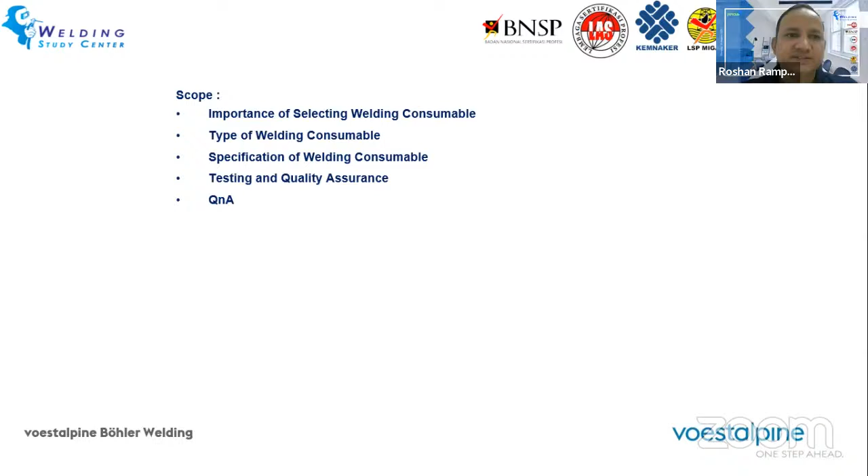The topic of today's webinar is selection of welding consumables. As already introduced, the basic points covered in this presentation include the importance of selecting a welding consumable, the different types of welding consumables, specifications for welding consumables, and testing and quality assurance requirements for welding consumables. These are the main topics for discussion today, and to support them I have included a few necessary subtopics. So let's start with the basics.

Let's briefly introduce different basic concepts in metallurgy and welding, starting with classifications of base material. What are the different types of materials? Here we are talking about metallic material, not non-metallic material. In metallic materials, there are basically two categories: ferrous alloys and non-ferrous alloys.

Ferrous alloys, as the name suggests, are basically iron alloys, meaning the majority of the elements present is iron. Non-ferrous means other elements are present as the main element.

What are the different types of non-ferrous alloys? One is nickel-based, another has aluminium as the main element, then copper, titanium, and other grades like cobalt alloys. These are a few categories or types of non-ferrous alloys.

Now coming to ferrous alloys, the main subcategories are unalloyed ferrous alloy, or unalloyed steel, and alloyed steel. Unalloyed, as the name suggests, has no alloying addition done to the iron or steel. Whereas in the alloyed category, there are low alloyed and high alloyed types.

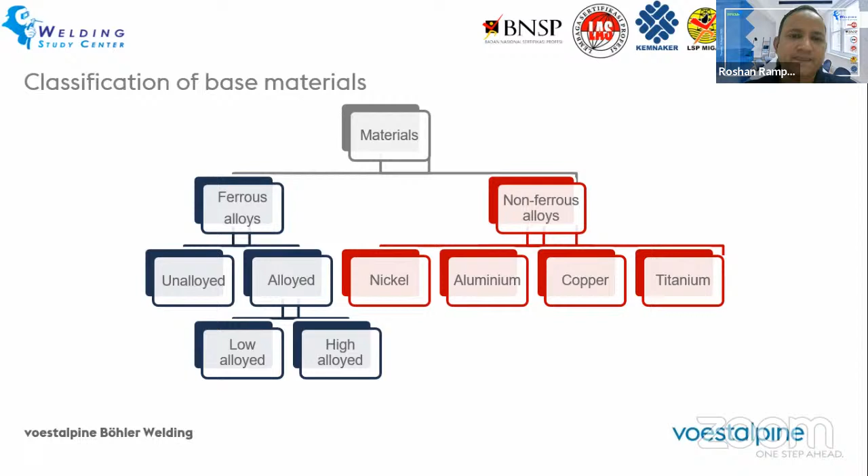Now let's talk about steel material. What is steel? Steel is a material which is an alloy of iron and carbon. It's majority iron, and when we add some percentage of carbon to it, it becomes steel. The maximum percentage of carbon allowed in steel is 2.06%, and beyond that it becomes cast iron. If you are aware of the iron carbide diagram, you are well aware about the categorization of steel and cast iron.

So why do we add carbon to iron? Because carbon increases strength and hardness, and the practical applications of steel are much more compared to pure iron, since pure iron as such has not much practical application. So carbon is added to different extents to get different properties.

Basically steel is an unalloyed material, but in practical application, there is no steel without any alloying addition. There may not be any material grades which just have iron and carbon in them without any other elements. So what are the other elements present? One is contaminants.

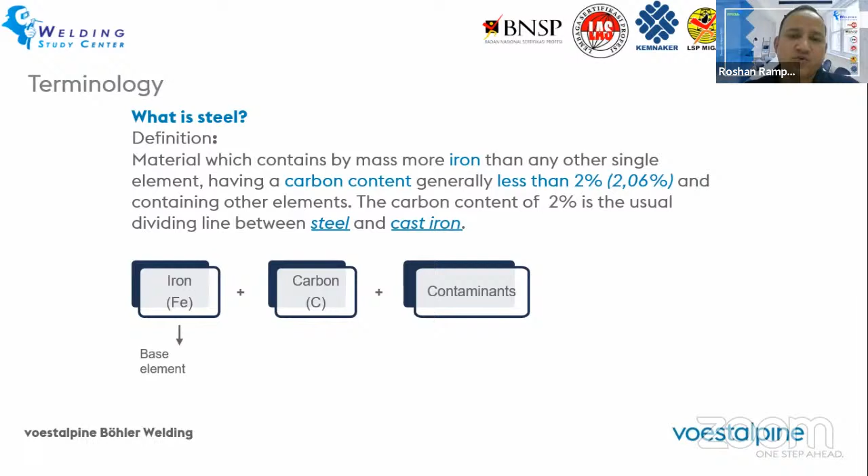Steel is produced by a steel making process from iron ore, then by refining process it is converted into the usable form of steel. During refining, there is still some level of contamination depending upon the acceptance criteria. Some are permitted contaminants, which are necessary up to a certain extent for certain properties, like manganese, silicon, and aluminum. These are generally deoxidizer elements added during the steel making process, and they are also present in the final steel up to a certain extent depending upon the type of steel being used.

Then there are non-permitted contaminants - we shouldn't really say non-permitted, but they are present up to a certain extent. We can't remove them 100%, but removing them to lower and lower percentages needs multiple refining processes or longer refining time, which increases the cost of the material. So depending upon the application and requirements, phosphorus, sulfur, oxygen, nitrogen, and hydrogen are left as is up to certain percentage levels, or certain ppm levels for nitrogen, hydrogen, and oxygen. Phosphorus and sulfur are also limited to a certain extent. These are the non-permitted contaminants.

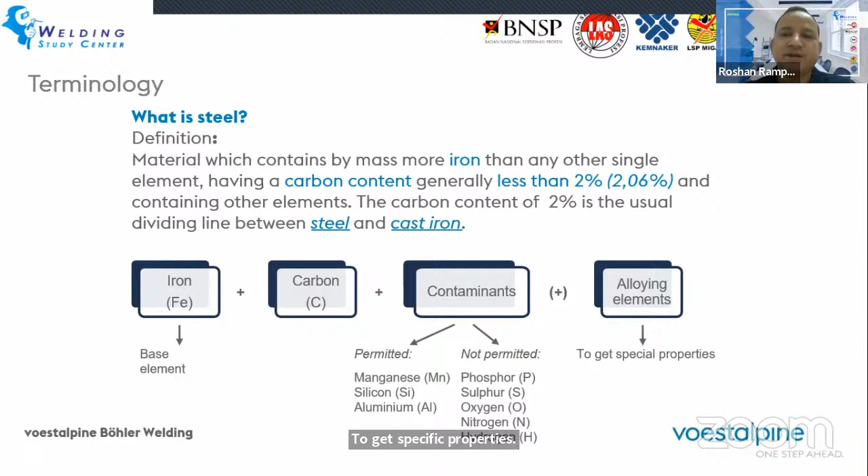So why do we do alloying? When we say manganese and silicon, we don't call these alloying elements - they are basically a part of steel itself, inherently present in it. But alloying elements are those elements which are deliberately added to steel to get specific properties. For example, chromium is added to get higher strength as well as corrosion resistance.

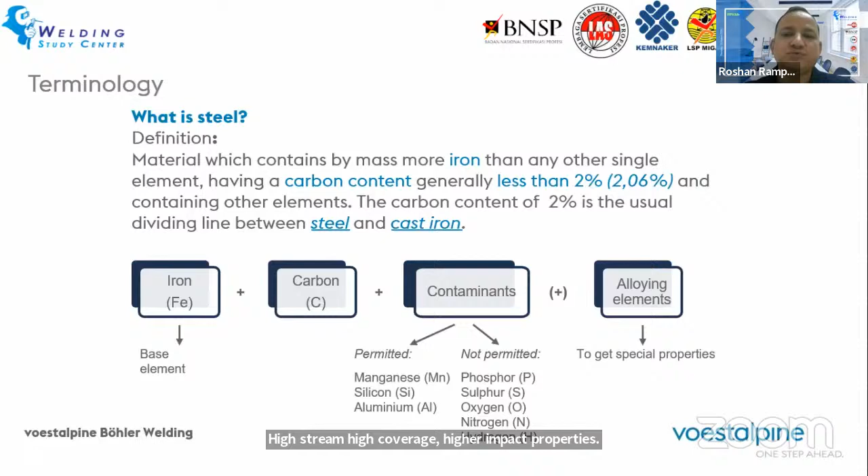Moly is added to get oxidation resistance at higher temperature. Likewise, different elements are added in different combinations to get special properties. What are these special properties? Because for practical application, we need high strength, high corrosion resistance, and higher impact properties. So for a particular use, we add a combination of alloying elements into the steel, and based on that, different types and categories of steel grades are available.

Now, when we talk about ferrous material, or steel, the majority of joining is done by welding. Most steel materials nowadays are majorly joined together by the process of welding. So what is welding? Most of you may be aware of what welding is - you might have been doing it on your regular day-to-day job.

But the book definition of welding is this: it's a joining process in which two or more parts are united or joined, producing continuity in the nature of the workpiece material by means of heat or pressure or both, and with or without the use of filler metal.

There are different numbers of different types of welding processes depending upon the source of energy, like whether it is heat, or whether it is pressure, or a combination of heat as well as pressure. So the most common is the arc welding process. Then there are resistance welding processes, solid state welding, brazing, oxy-fuel, and soldering. All these are joining processes, or welding processes, as a broad category.

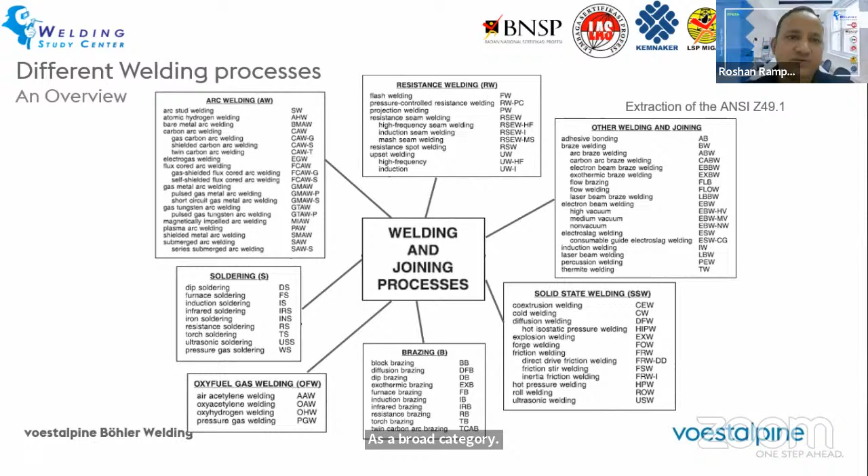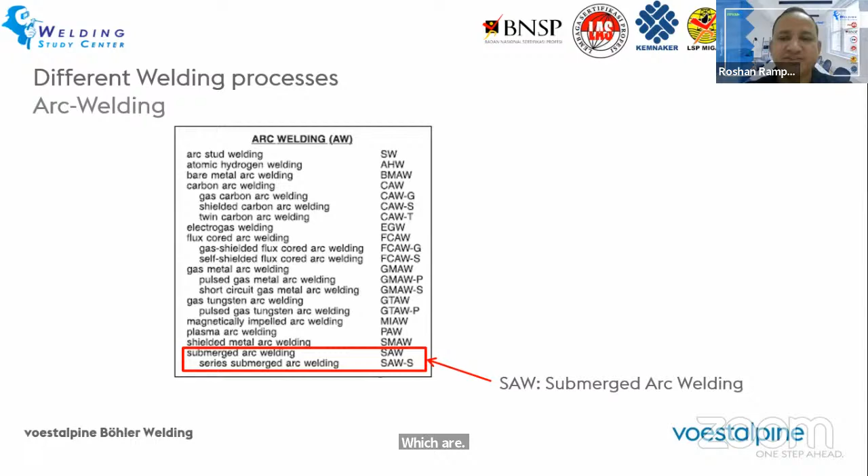The most practical applications for welding are in the arc welding process, and there are a few welding processes which are very commonly used in the welding industry. These are SMAW, shielded metal arc welding, GTAW, GMAW, FCAW, and submerged arc welding, SAW. In this topic, we will be covering these five processes in a little bit of detail.

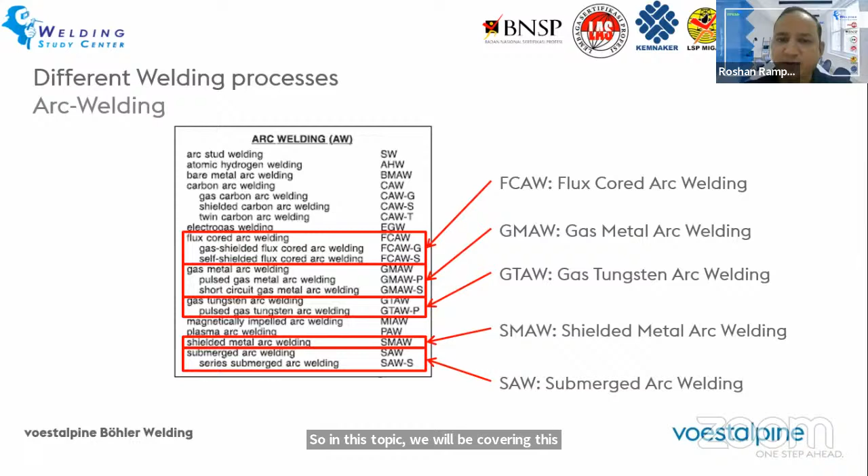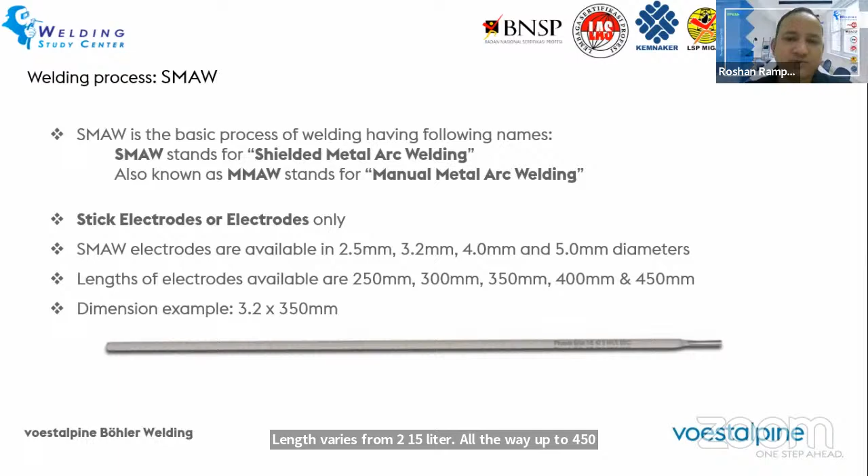So coming over to the SMAW process. SMAW stands for shielded metal arc welding, also known as manual metal arc welding. The main consumable part is a stick electrode, or electrodes. These are normally available in 2.5, 3.2, 4 millimeter and 5 millimeter diameter, with length varying from 250 millimeter all the way up to 450 millimeter. This is a photo where you can see a typical welding electrode.

Similarly, GMAW is gas metal arc welding. This is a gas shielded welding process, also called MIG or MAG. Whenever an inert gas is used as the shielding medium, it is the MIG process, or metal inert gas arc welding, and if an active gas is used, it is metal active gas welding. Different types of spools are used, with wire diameters ranging from 0.8 all the way up to 1.6 and 2 millimeters. The most common form is the plastic spool or basket spool, also available in drum packing.

The next process is flux core arc welding. This is a variant of the GMAW process itself, and the main difference is that in GMAW the spool or wire is a solid wire, whereas in flux core arc welding the wire is a tubular wire, meaning flux powder is present inside the wire tube. The variant of this process is MCAW, in which the wire, instead of having flux powder, has metal powder inside, which is called metal cored wire.

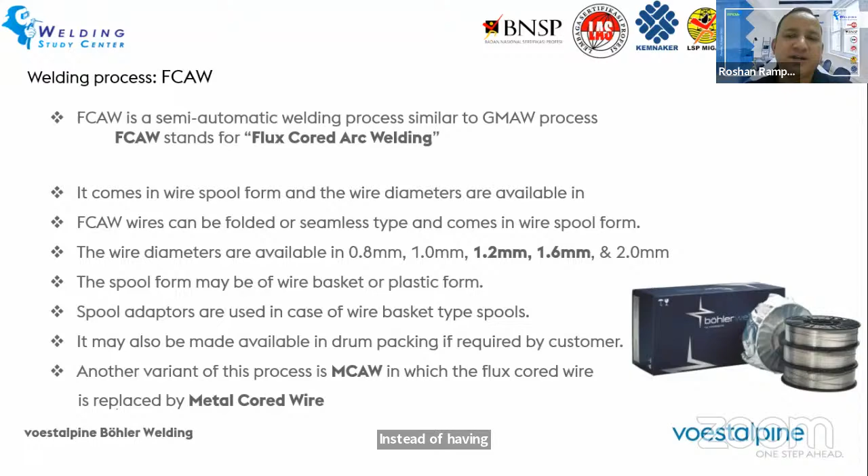The next process is GTAW, gas tungsten arc welding, in which the filler rod acts as filler wire. It is not an electrode, because unlike SMAW, GMAW and FCAW, where the wire or electrode itself acts as an electrode with current flowing through it, in GTAW the tungsten electrode is the non-consumable electrode through which current flows, whereas the filler metal, or TIG rod, is added as filler. So the current does not flow through the consumable part. That is the difference between a consumable electrode and a non-consumable electrode.

The dimensions generally used are 1000 mm length, and the diameter of the TIG rod is generally 1.6, 2.0, or 2.4, though bigger and smaller diameters are also available. For automatic TIG welding, it can also be supplied in spool form.

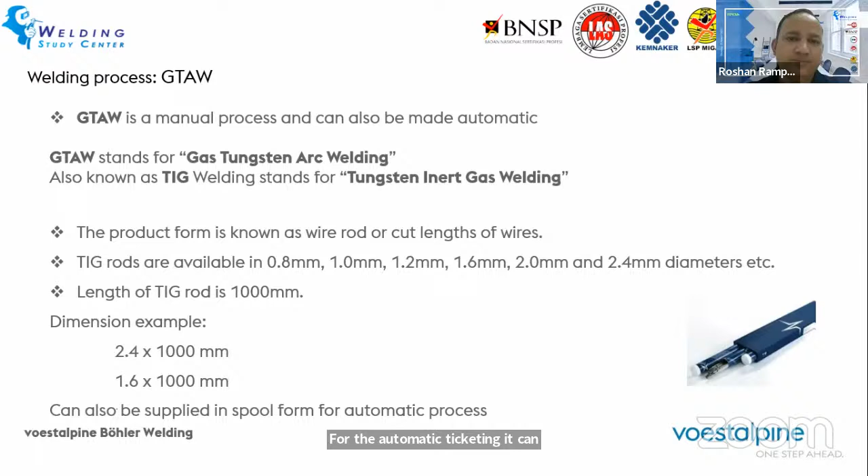Now the next process is submerged arc welding. This is an arc welding process most commonly used in fully automatic form, meaning the travel speed as well as the feeding of the wire is automatically controlled. As the name suggests, the arc is submerged under a burden of flux. There are two consumable parts supplied separately: the SAW wire and the SAW flux. Flux is an important part in this process, and the most common welding position in which SAW is used is flat, and in certain applications, horizontal position.

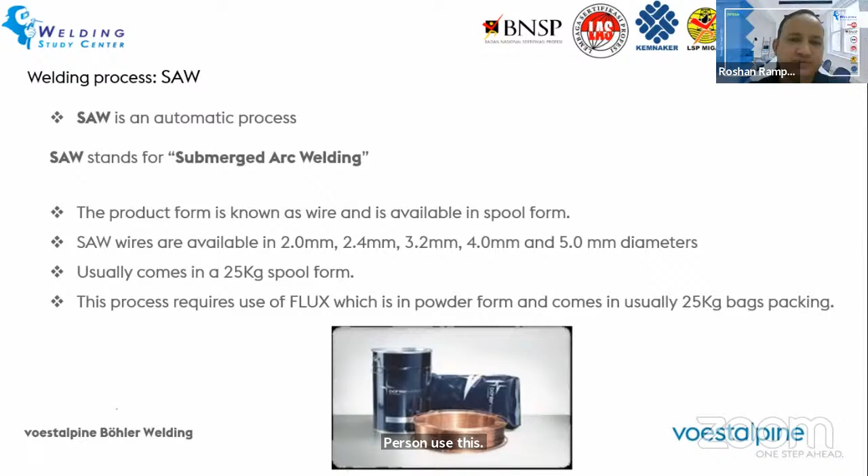Now, when we talk about welding positions, there are different welding positions classified as per EN/ISO as well as ASME code. So when we talk about ASME code and EN/ISO, there are different types of positions, or different nomenclature, for different positions in which welding can be carried out.

The first photo here is mentioned as PA position, which is a 1G position. That means the electrode is held vertically and the plane of the base material is horizontal to the ground, with welding carried out from the top. So this is a flat position, or 1G, or PA position. Similarly, 2G is a position in which the plane, or axis, of the plate is vertical to the ground, perpendicular to the ground, and the welding is carried out from side to side.

In the similar way, 3G position or PG position is the vertical down position, and another variant is vertical up position, as you can see in the photo.

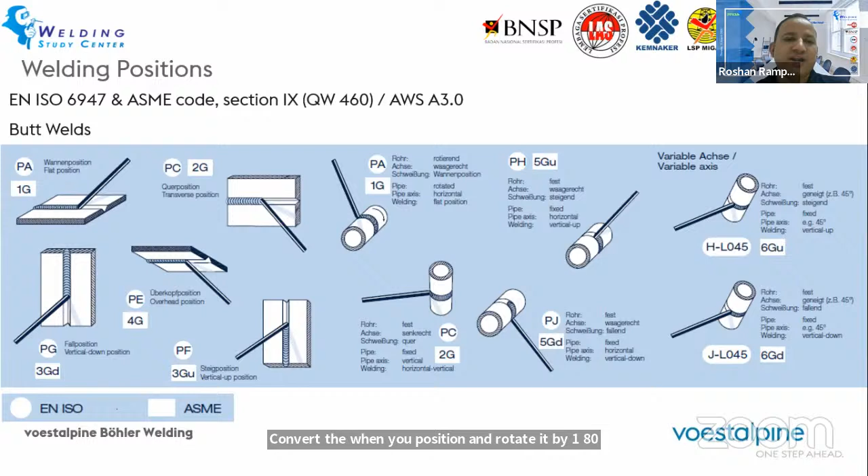Then there is the overhead position, in which if you convert the 1G position plate and rotate it by 180 degrees, the plate will become overhead, and the position will be carried out from below.

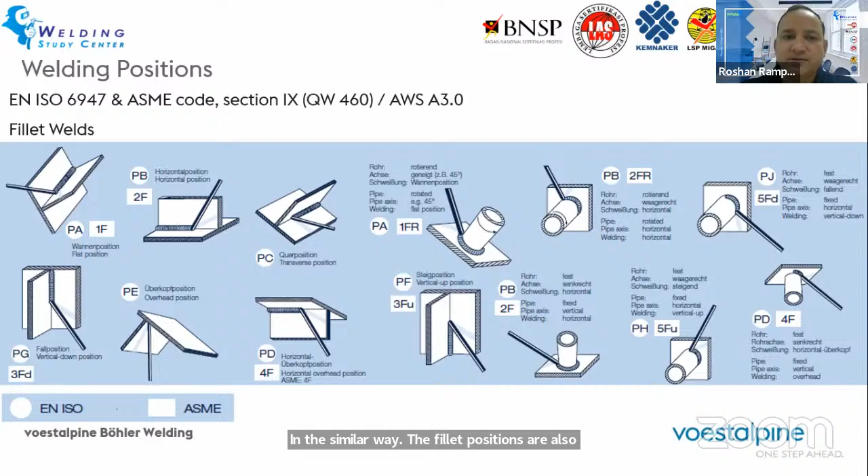In the similar way, there are welding positions for pipe: 1G, 2G, 3G, 5G, and 6G positions. Similarly, the fillet positions are also classified as 1F, 2F, 3F for the pipe. This is just for your reference to know about the welding positions.

Now coming to our topic of why we need a guideline to understand the selection of welding consumable. In most applications we do qualify our procedure, but what is the basis of choosing the right welding consumable?

The first and foremost important criteria is the application's requirement. This depends upon what component we are going to fabricate and what material is selected for that particular application and component.

There are different welding consumables, different grades and types, designed for joining matching or compatible base materials. Selection of the right welding consumable for the right base material ensures correct joint integrity as well as fusion with the base material, which is very important for the integrity of the whole structure. So first and foremost is material compatibility.

Next we talk about the mechanical properties of the base material and its matching welding consumable. Whenever we select a welding consumable, depending on the base material's mechanical properties, it should have matching mechanical properties. In most cases, slightly overmatching welding consumables are used for a particular grade of base material.

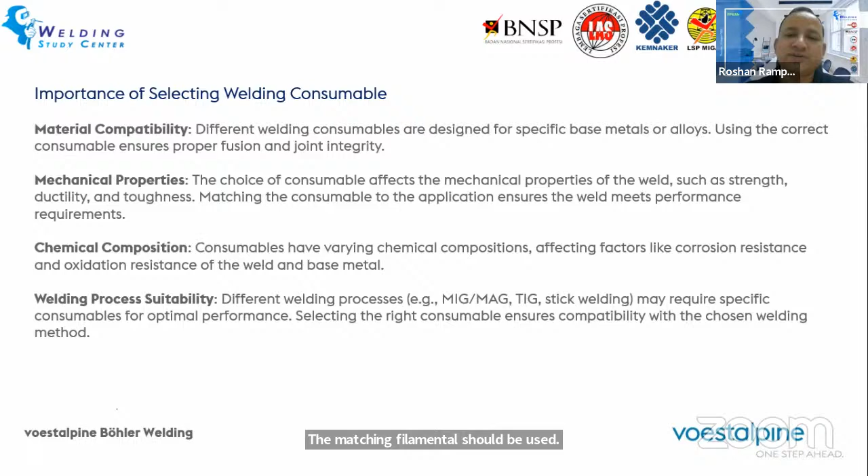Next is welding position. For example, when we use one particular type of electrode, some types are used for a particular welding position but not suitable for any other welding positions. For instance, some electrodes are designed for vertical down position, but not all types of welding electrodes can weld in vertical down position.

It should be an all-position electrode, not only for flat and horizontal position. So depending upon the welding position you are going to use, the welding consumable has to be selected.

Then the next point is ease of use, because the welding consumable should also be selected based on its weldability and suitability for that particular application, depending on how easy it is to use. So if all other properties are matching but ease of use differs, for example, rutile type electrode is better as compared to basic type electrode.

Then that particular rutile type electrode should be selected because it is easier to use, has better stability of the arc, and very less spatter level. All these criteria are also used because they improve the efficiency of the welder as well as reduce the downtime.

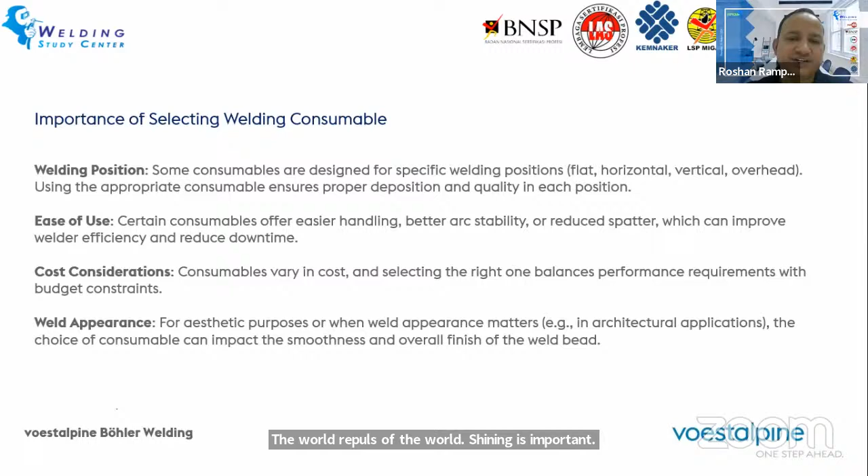Now coming over to what are the different specifications of welding consumables.

Welding consumables are classified as per different national and international classification specifications like AWS, ENISO, DIN or JIS specification. Different societies have their own specifications for classification of welding consumables, but the most common in our day-to-day job work is AWS classification and sometimes ENISO classification.

AWS is nothing but American Welding Society, which assigns a specific code to welding consumable that indicates their type, their material compatibility, then its intended use. For example, AWS A5.1 covers the SMAW electrode for unalloyed steel. Then material grade.

The classification also includes the type of material for which the welding consumable is designed for. For example, when we say ER316L, that means this particular filler rod or wire is designed for joining of stainless steel 316L type of base material. It is also classified based on the chemical composition. Even for the nickel alloyed steel, the nickel alloys also have classification based on their composition, like

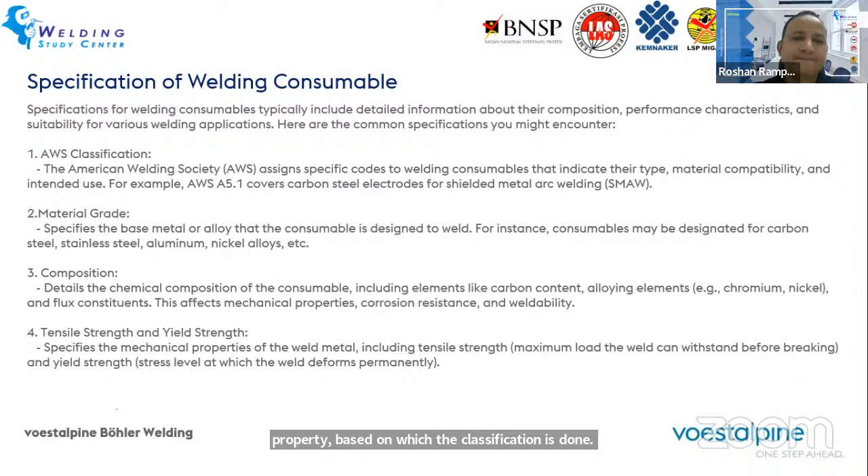NiCrMo3 - this indicates the main alloying elements. Then the tensile strength and yield strength are also important properties based on which the classification is done. It also includes the elongation criteria. Then impact toughness is also considered for classification purpose in some of the specifications.

Then welding position is important. When we talk about welding position for classification, specifically for SMAW as well as FCAW wire, 0 is generally indicated for flat and horizontal classified consumables, whereas 1 in the classification indicates it's an all position wire or all position electrode.

Some products like FCAW wire are also classified based on the shielding gas for which it has been designed, like general designation for FCW is mixed gas M21 or 100% CO2. So the classification will also have this indication of the shielding gas. Then welding parameters like voltage, current, wire feed, travel speed are also to be specified because they will decide the deposition rate as well as the weld quality.

Then certifications and approvals - different organizations, international bodies, regulatory bodies have their own specification for classification of welding consumables. So why do we need these different specifications? To have a uniformity across the regions or across the nations. It helps welders, welding engineers and fabricators to select the right consumable type for their base material or for their welding application.

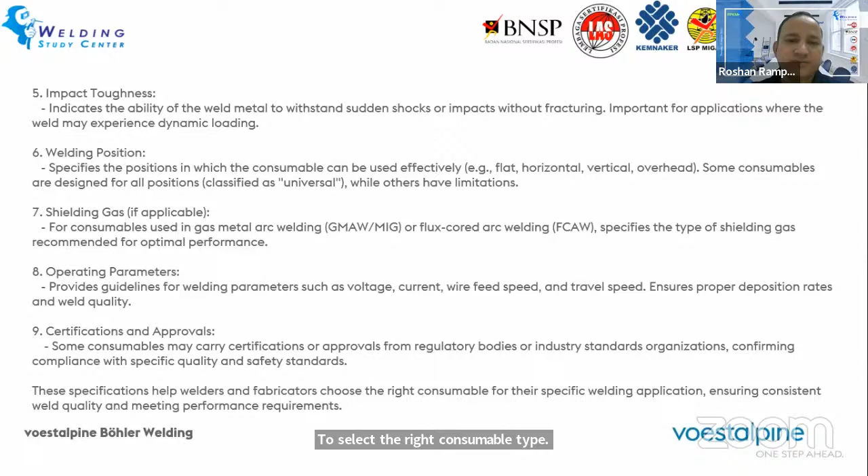So what are the different testing requirements for classification or to maintain the quality of welding consumables? There are basically two different types of material testing. One is non-destructive NDT, which includes radiography, LPI, MPI, visual inspection and ultrasonic UT testing, where the material is not destructed but the material integrity remains as it is. Then there is destructive testing, in which the material is broken down to check a particular property, like tensile test.

The tensile specimen is prepared, put into the universal tensile testing machine, and tested to determine the tensile properties including UTS, YS, and percentage elongation. Similarly, impact specimens are prepared and impact testing is done at different temperatures. Bend test, creep rupture test, hardness test, and metallography are some examples of destructive testing. Also, corrosion testing, which is not mentioned here, also comes under destructive testing, but it is not a mechanical test, it's a corrosion testing.

The testing and quality assurance process for welding consumables are very important to make sure they meet the minimum requirement for the classification or for the application, so that the integrity of the weld joint is maintained. What are the different testing to be done or criteria considered when we say the quality of the welding consumable is met as per the requirement.

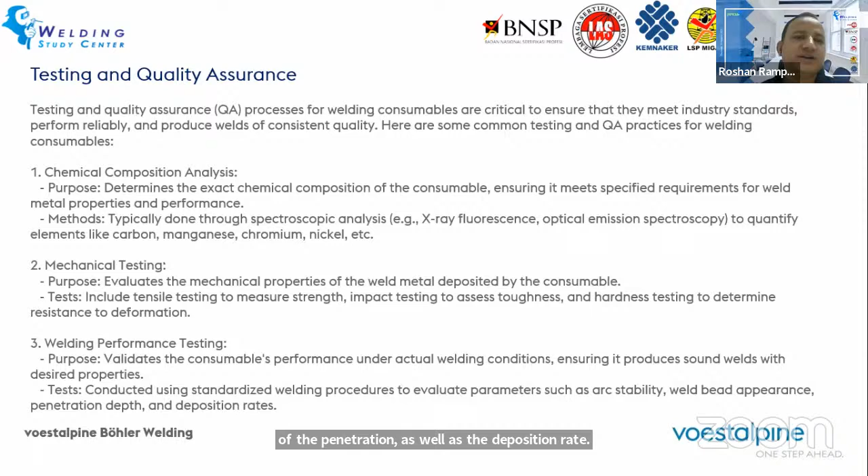Then measurement of the diffusible hydrogen content. Why is it important? Because for most steel materials, we do not need higher hydrogen content in the weld deposit, because if higher hydrogen is deposited through the welding consumable, there is a possibility of cold cracking or hydrogen induced cracking in the weld joint, HAZ, and also in the base material. So the diffusible hydrogen content is determined, and based on that, different classifications like H4, H8 are given to welding consumables.

There are different lab methods to determine the hydrogen content. Then microstructural analysis of the weld deposit is also done to check the phases which are present, like ferritic phase, bainite, martensite, or whatever secondary phases are present in the weld deposit, which can be determined by microstructural analysis. Then corrosion resistance tests, as per different international standards, are conducted to check the suitability for any particular corrosive media application.

There are also different tests involved for different types of corrosion, like pitting corrosion, intergranular corrosion, crevice corrosion, and others.

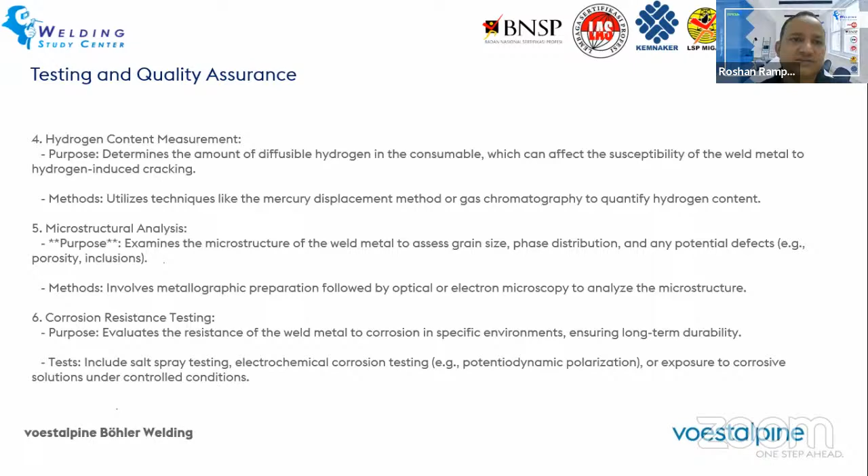Then another quality assurance criteria is the dimensional inspection of the welding consumable. So when a particular size is mentioned, like 3.2 into 350 mm for the welding electrode, there is a tolerance level given in the international standards which needs to be met for that particular size. It should not happen that 3.2 mm diameter is mentioned, but the actual dimension is 4 millimeters, because the selection of welding parameters will also change accordingly. So it should be within the tolerance level.

Then certification and compliance with relevant industry standards, international codes and regulations, and client specifications also has to be met. In many cases, the certificate of compliance is also issued along with the test report, the certificate, and traceability of the material can also be given.

Then process control and quality management system is also to be checked. The most common quality management system is ISO 9001:2015. So these are some of the criteria which are tested or done to make sure that the selection of welding consumable, or the welding consumable which is supplied, is meeting the application's requirement.

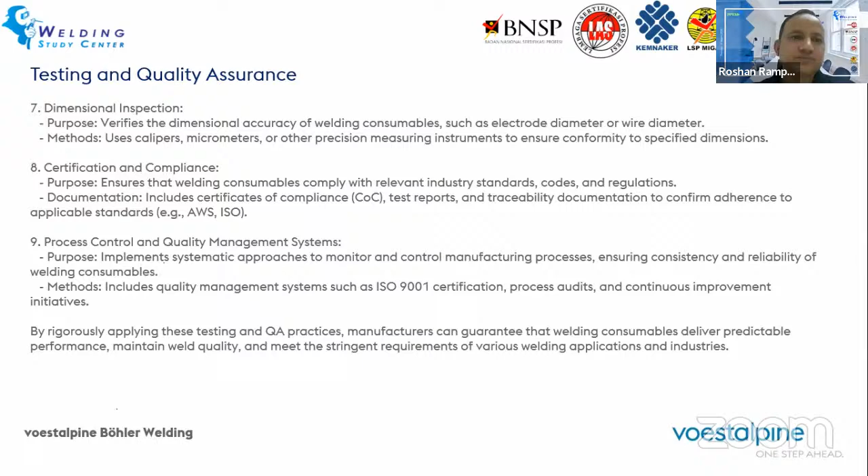Now, as we have seen in the previous slides, there are different types of welding processes. There are different types of welding consumables for different processes, and other accessory consumables are also there. So based on the welding process, different welding consumables are available.

For example, for the SMAW process, coated electrodes are used. The structure of the stick electrode has a steel core wire, and on top of it, the flux coating is covered. Depending upon the type of electrode, the composition of the core rod and the type of coating is different. So what is the main function of the coating? It contains a mixture of flux.

The basic function is it helps to shield the molten weld pool from atmospheric gases and to stabilize the arc. In some cases, it also acts as a medium to add additional alloying elements from the flux.

Then for GMAW or FCAW, the wire used is either solid wire or flux core wire. For GTAW, these are solid wires. For FCAW, it is a core wire or tubular wire. Then for submerged arc welding, there are two combinations: one is the wire, and the other is the flux. They are fed separately, but in combination, they determine the properties of the deposited weld metal. So these are the welding consumables for different processes.

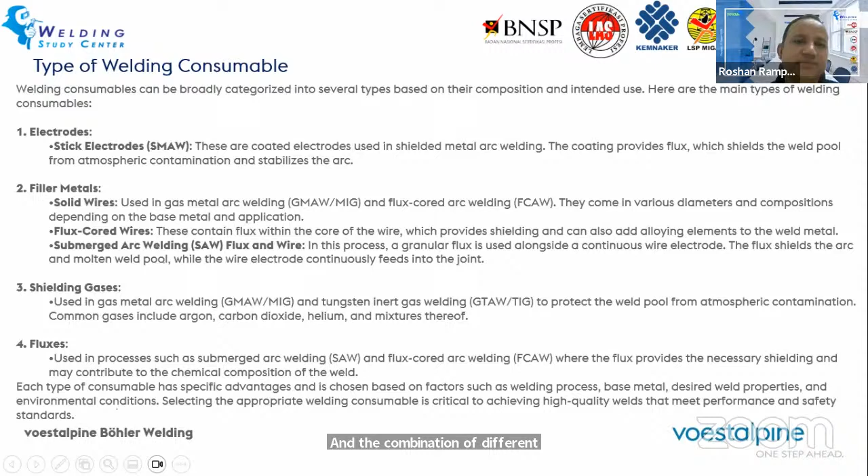So what are the main tasks of the flux in an SMAW electrode? This helps to have shielding against the atmospheric air so that there will not be any contamination and porosity. Then it improves the welding behavior like arc ignition, wetting properties, and viscosity of the molten metal pool. These are also determined by the composition of the flux. It also helps to get higher recovery.

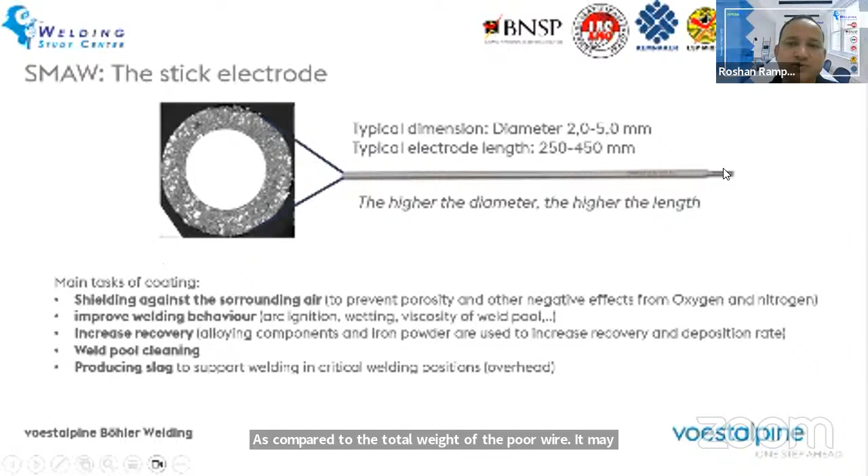For example, 70-18 - that 18 indicates that iron powder is added into the flux so that we get higher recovery. Recovery here means, when we talk about the total weight of the core wire, how much weld deposit we get in combination of the electrode as compared to the total weight of the core wire. It may be more than 100% also. So this also helps to determine the metal recovery.

Then the slag which is formed during welding also helps in cleaning the molten metal pool. It produces the slag, and in out-of-position welding, the slag provides support to the underlying molten metal pool so it stays in place without causing any drop. So these are the basic functions of the flux coating.

Similar functions are applicable for the flux powder inside the flux cored arc welding (FCAW) wire also.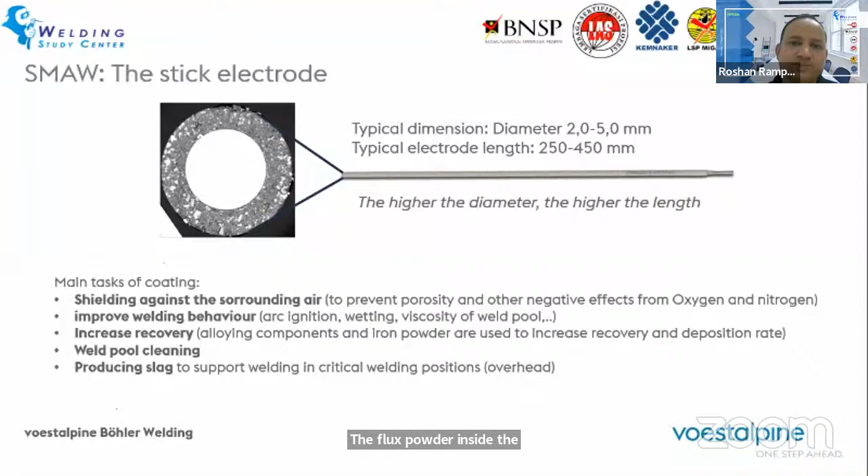So just to show you some applications of SMAW - of course there are different processes that can also be used in similar applications like structural steelwork, wherein SMAW, GTAW, GMAW, or FCAW process can also be used. Then jack-up rigs also for offshore applications. These are some examples along with the base material type S690QL1, and the welding consumables used for fabrication of this particular grade are also mentioned here.

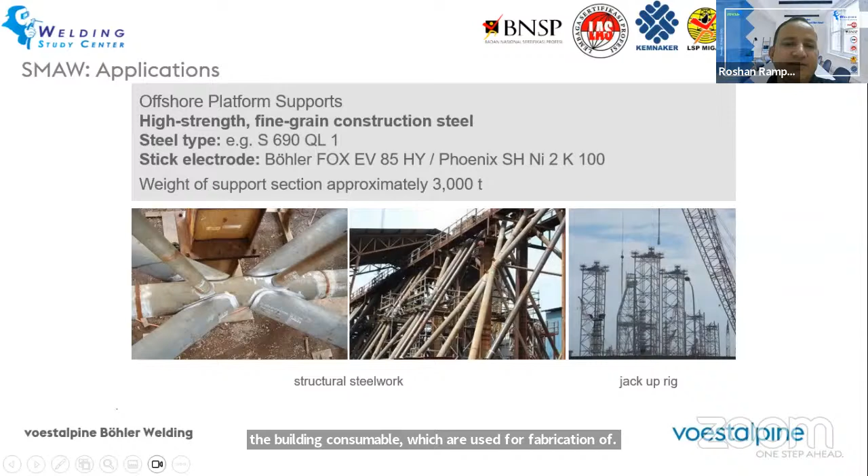Then pipeline welding - the most common type of electrode is cellulosic electrode, used for cross-country pipeline welding. The reason being, cellulosic electrodes have higher arc penetration, and they can also be used in vertical downward position without any problem with control of the arc. So cellulosic electrodes are the most common type used for vertical down position, especially for cross-country pipeline applications.

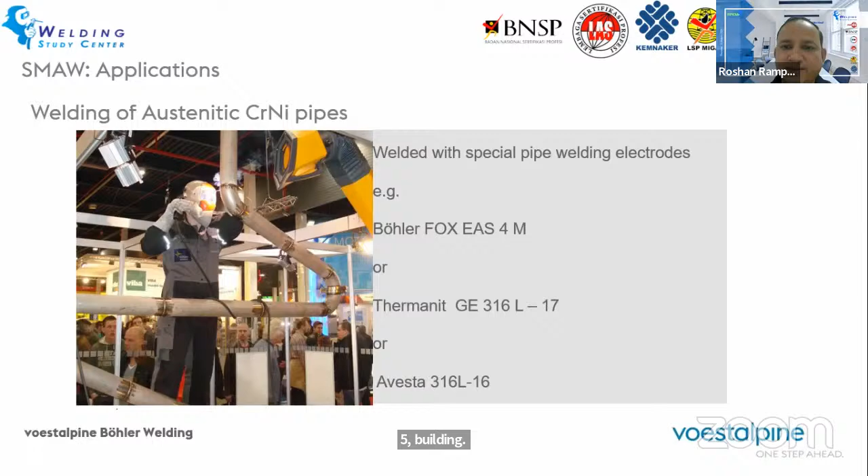Then use of SMAW electrodes for austenitic 300 grade series chrome-nickel pipe welding in 5G and 6G positions. SMAW electrodes are classified or categorized based on different types of coating, and the types of coating are determined based on the components of the minerals used for production of those flux coatings.

Cellulosic type is one, another is acidic, also similar is the rutile type, and another is basic type. In the cellulosic type, the main component is cellulose, and others are like TiO2, SiO2, FeMn. Whereas in the acidic type, magnetite and quartz are the main composition of the flux. Rutile is nothing but titania, which is TiO2, titanium oxide, the main component. And another is the basic type, in which the basic flux components are in higher proportion, like CaF2 and CaCO3 are the main components for basic type.

So why do we need all these different types of coating? One reason is different applications and different requirements of mechanical properties. For example, the basic type is generally not suitable for welding in vertical downward position. Also, acidic and rutile coating electrodes are not suitable for vertical down position, but cellulosic type can very well be used in vertical down position.

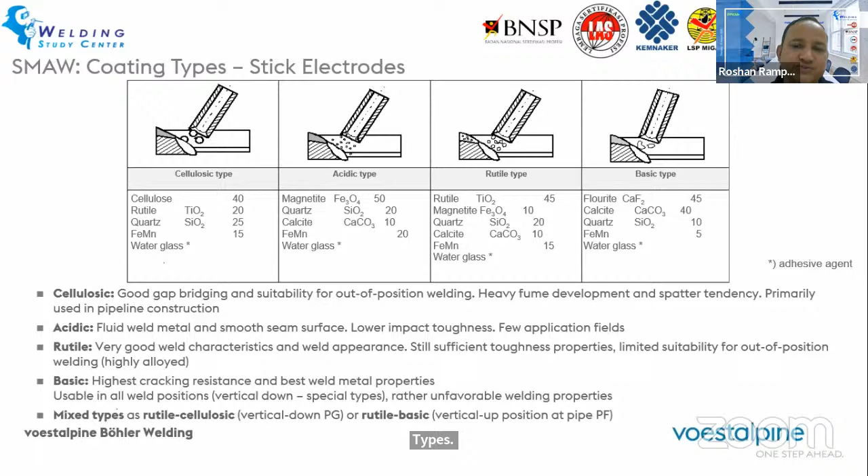Then there are certain mixed types also, like cellulosic rutile, wherein a combination of two types of coating components are used. As per the normal nomenclature, A is used for acid, C for cellulosic, R for rutile. Then heavy thick rutile coated is double R. Rutile and cellulose coated is a combination like RA, RC, RB, and then there is basic coated electrodes.

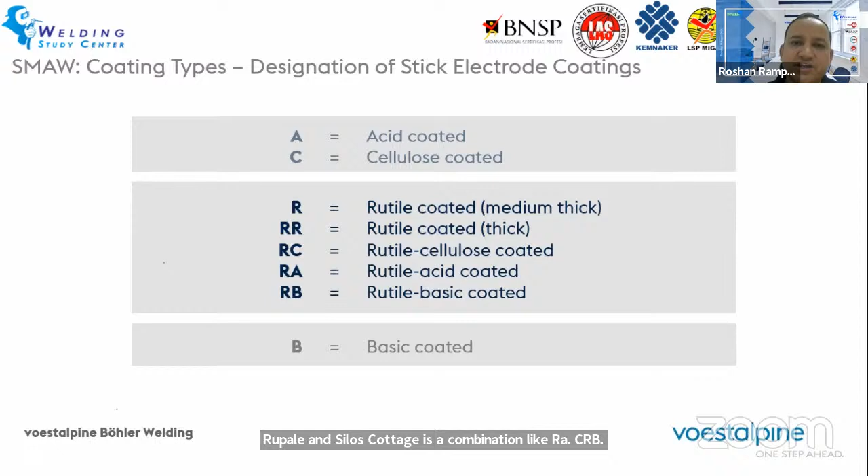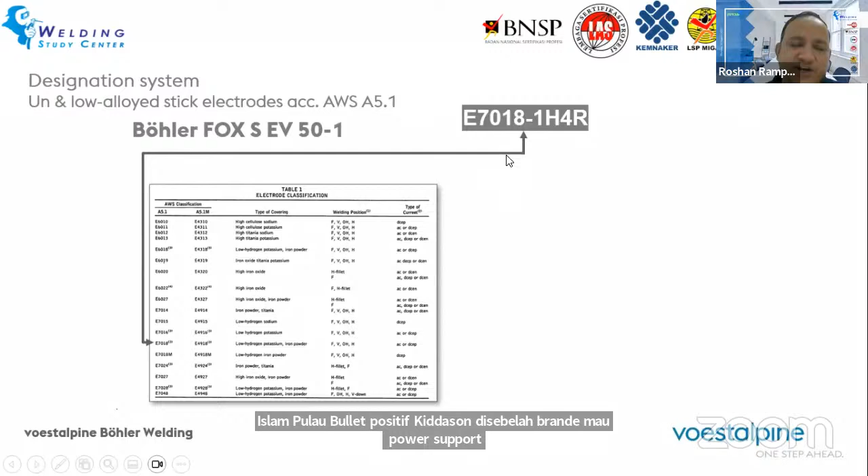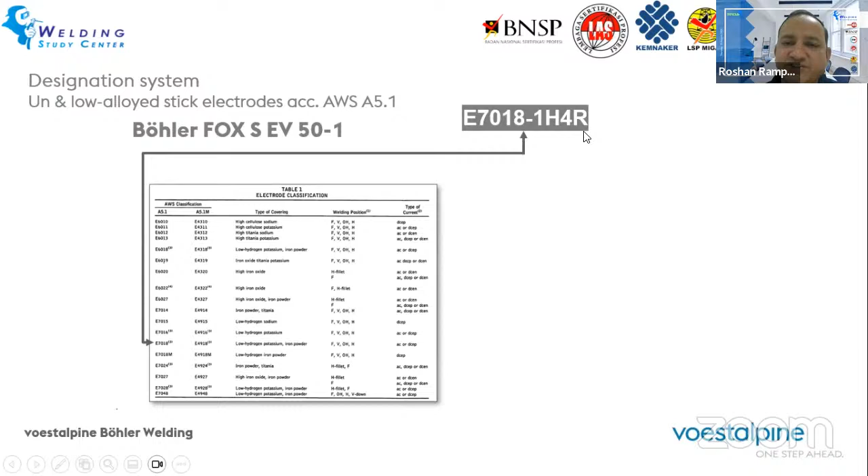Talking about the AWS classification, we'll take an example of Böhler FOX S EV 50-1 - this is a brand name or product name. The AWS classification as per A5.1 is E7018-1H4R. Each and every letter in this classification signifies something. In the classification 7018, the type of covering is low hydrogen potassium iron powder covering.

It is suitable for welding in positions like flat, vertical, overhead, and horizontal - so it is an all-position wire. It also indicates the type of current in which it can be used - it can be used in AC polarity as well as DC electrode positive polarity. So this is the classification for E7018.

Likewise, there are different classifications: 6010, 6011, 7018, 7024 - all those different types of classifications are there. So this is potassium basic type used for these positions.

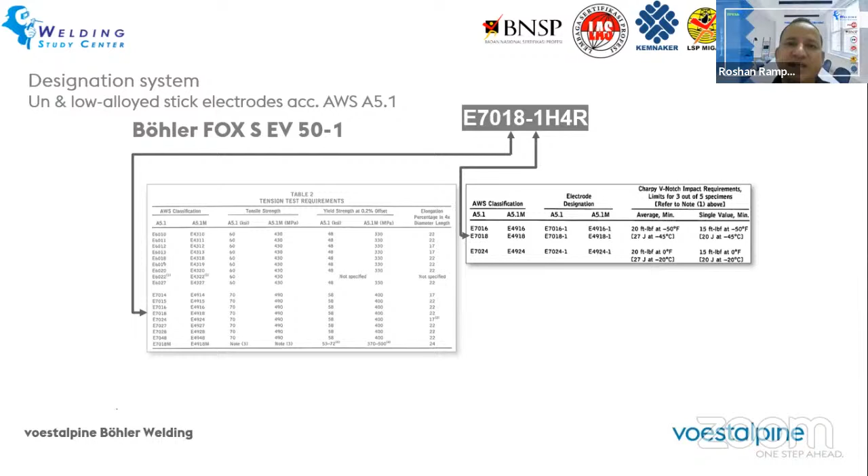Similarly, when we talk about stainless steel electrodes, they are classified based on the chemical composition, generally based on the steel base material which is suitable or matching with the chemical composition of the electrode. Different coating types are classified based on their usability designation. Most common is -15, -16, and -17. -15 is basic coated electrode, -17 is rutile or acidic coated electrode, whereas -16 is in between - it is a basic rutile type in which there is a mix of basic as well as rutile flux components. I have already explained the effect of selecting different types of coating for different stainless steel material.

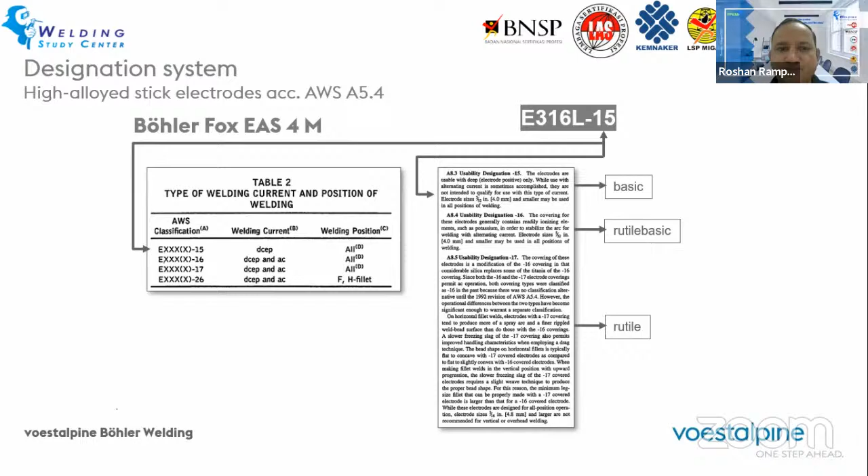Then how do we store and how do we handle these electrodes? Each and every consumable supplier has different recommendations in terms of storage guidelines and rebaking or re-drying recommendations.

General recommendations are it should be stored in factory supplied condition without tampering with the original packing. It should be used on a first in first out basis. The storage room should be having a controlled temperature and humidity level.

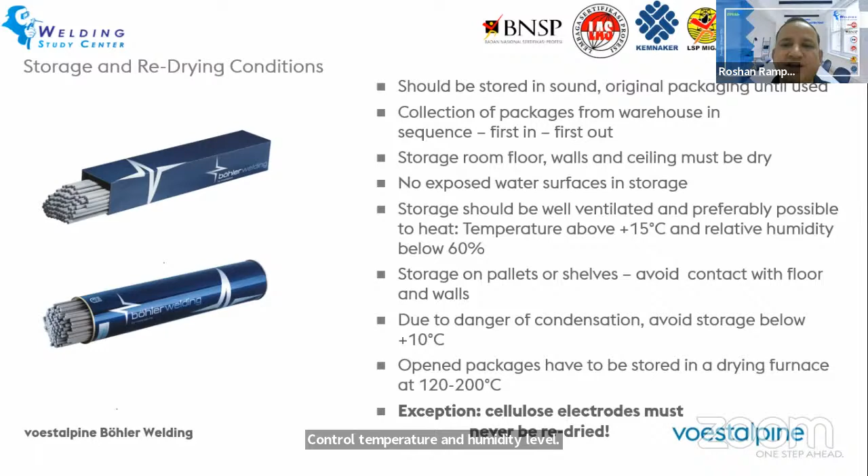General temperature recommendation and humidity level depend upon different types of products. It should not be in direct contact with the walls or the floor. The temperature should not be too low because there is a possibility of condensation, and it should not be too high also.

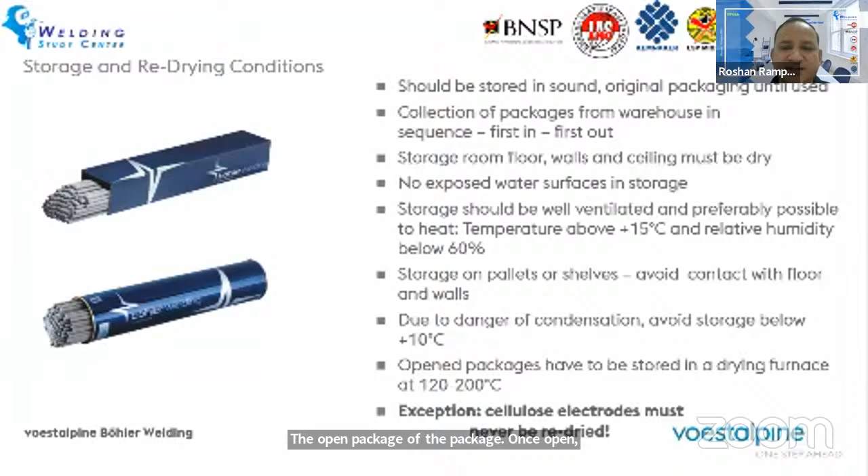Once the package is open, the electrode needs to be stored in a drying furnace, with the temperature depending on the manufacturer's recommendation for the product. One thing to highlight is that cellulose electrodes must not be re-dried. They should be used as is, because the cellulose has some hydrogen or moisture content which is necessary to get the desired arc intensity.

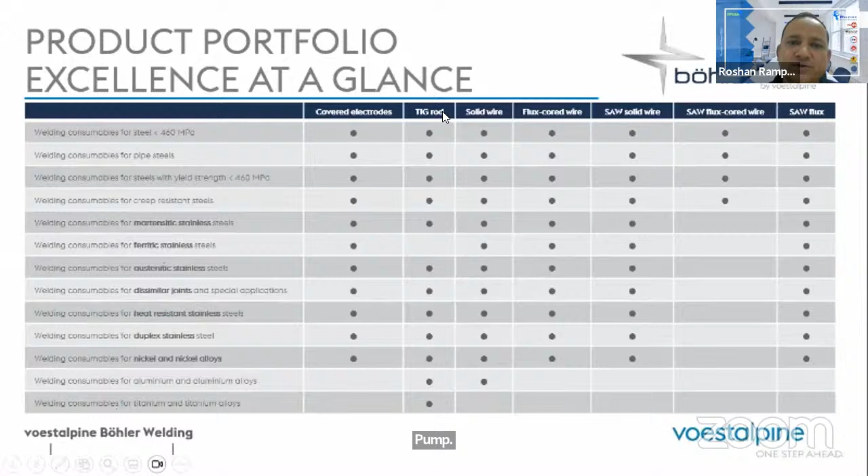Now coming to our product range, at voestalpine Böhler Welding we have a complete range of welding consumables for all types of materials. When we talk about welding processes, we have covered electrodes for SMAW, TIG rods, solid wires for MIG-MAG process, as well as solid wire for SAW.

And we have the complete range of flux core wire. SAW flux core wires are also available. In this SAW flux core wire, instead of solid wire, we use the flux core wire along with additional flux.

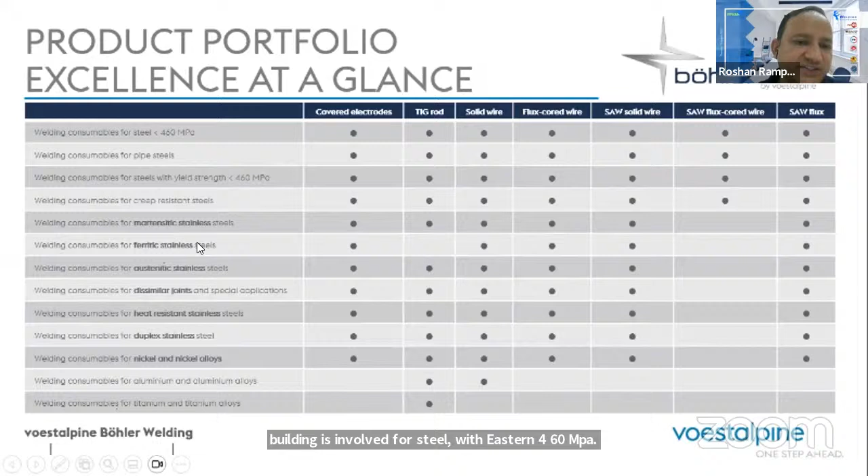Solid SAW wire as well as SAW flux are available for the complete range of materials, starting from steel with yield strength over 460 MPa, pipeline material, welding consumables for steel with yield strength less than 460 MPa, creep resistant steel, martensitic stainless steel, ferritic stainless steel, austenitic stainless steel, dissimilar metal joining, and some special applications.

Then heat resistant stainless steel or nickel alloys, duplex stainless steel, super duplex stainless steel, nickel alloy, aluminum and titanium alloys. So this covers almost everything. Even cobalt alloys are also available in our range, which are generally called stellite material.

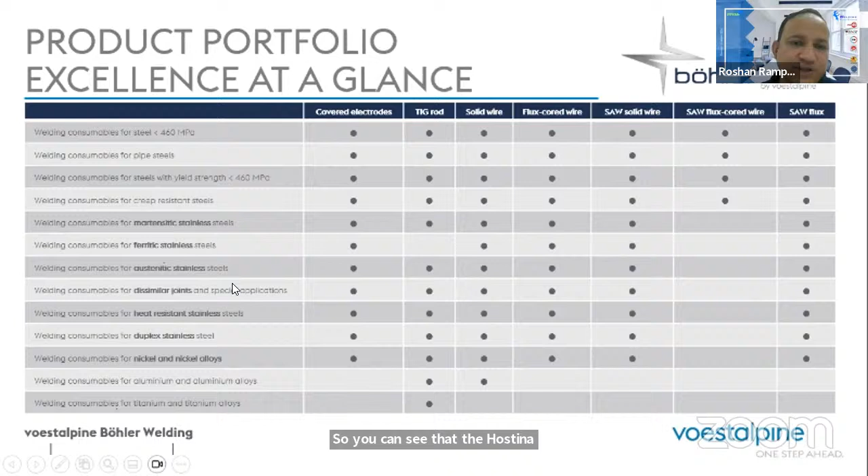So you can see that the voestalpine Böhler Welding product portfolio is a comprehensive product portfolio in which almost all the requirements from the industry are covered.

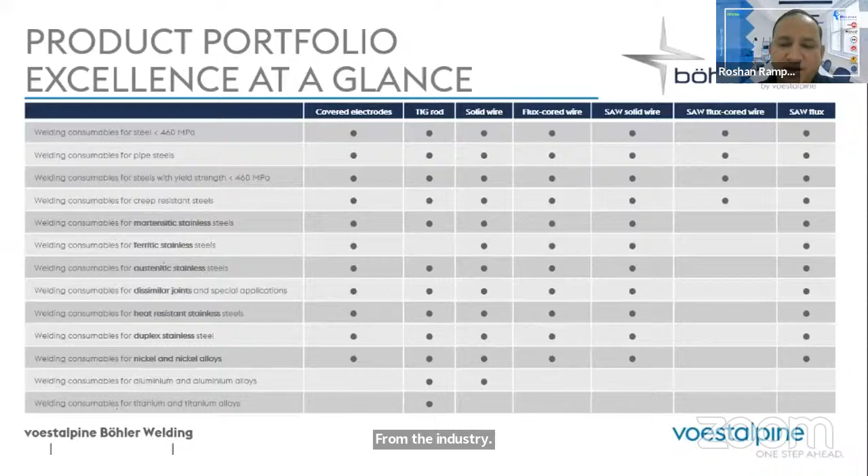That's all from my side. If you have any questions, please feel free to ask.

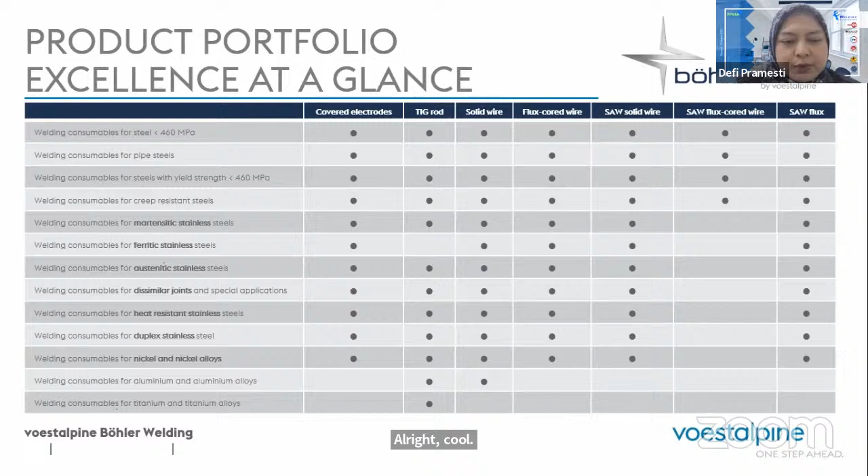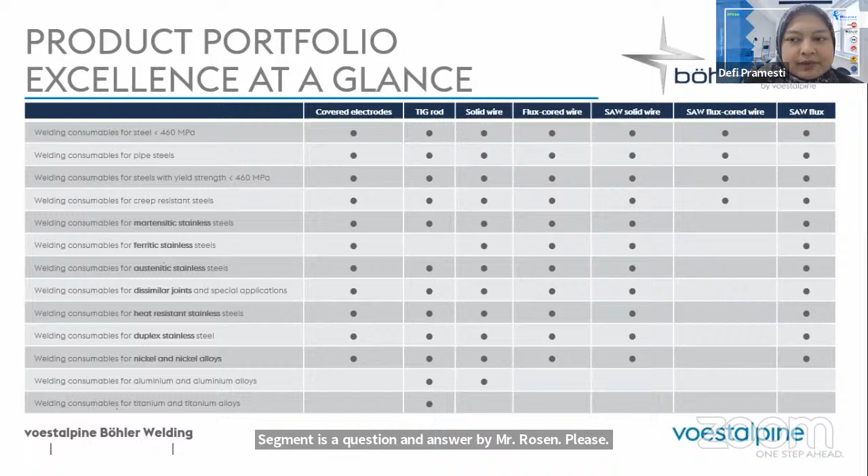Can you share the first slide, Mr. Roshan? So the first question is, which of the following type of coating is generally more suitable for welding in vertical down position? Your options are A, basic, B, cellulosic, C, rutile. Everyone who can answer, please raise your hand.

If you have listened to my presentation, I have already covered this topic. It's easy, Mr. Roshan. Okay, who can answer this question? We will give you a souvenir from us if you can answer this question.

Please go ahead, sirs and madams. Pak Syahrial answered option B, cellulosic. How about the answer, anybody else who already answered? Pak Sario answered B and Pak Sandro answered A. The answer B is correct. So Pak Syahrial, we will give you a souvenir and we will contact you.

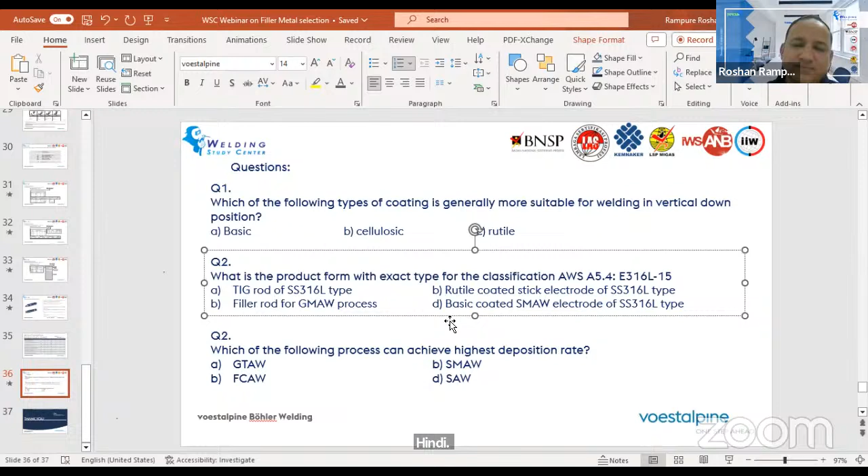Sorry, wait. Okay, this is Mr. Hendy. Mr. Ramaya answered A. Okay, then the next option, that is correct: rutile coated stick electrode for SS316L type, or basic coated SMAW electrode for SS316L type. So yes, what is the correct answer? Anyone?

Mr. Ramaya, answer D for number... oh, this is for number 2. Yeah, answer A.

Who answered B? No one. Pak Sandro answered B. Which B? Actually, there is a typing mistake, so can he mention which B? Rutile coated stick electrode or filler rod for GMAW?

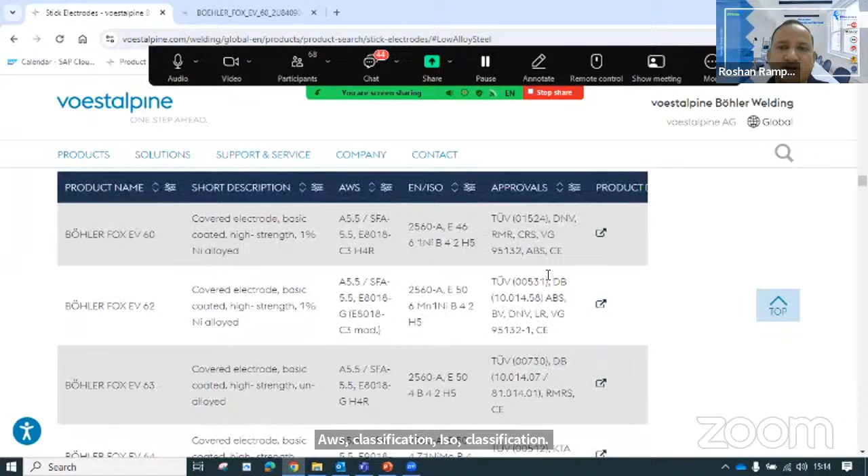There are different classifications, different types of product names, their short description, AWS classification, EN ISO classification, and approvals available for this product. The data sheet can be downloaded from here, available in German and in English. Safety data sheet is also available.

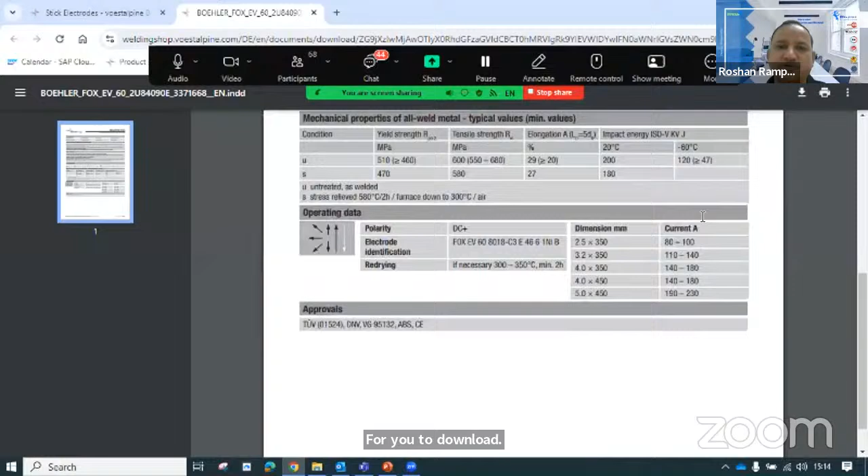So if you click here, for example, it will open the product data sheet. You will see the product data sheet and can download it from here also. This is free to download, and you can find the complete information about this product. In a similar way, there are different products with different classifications.

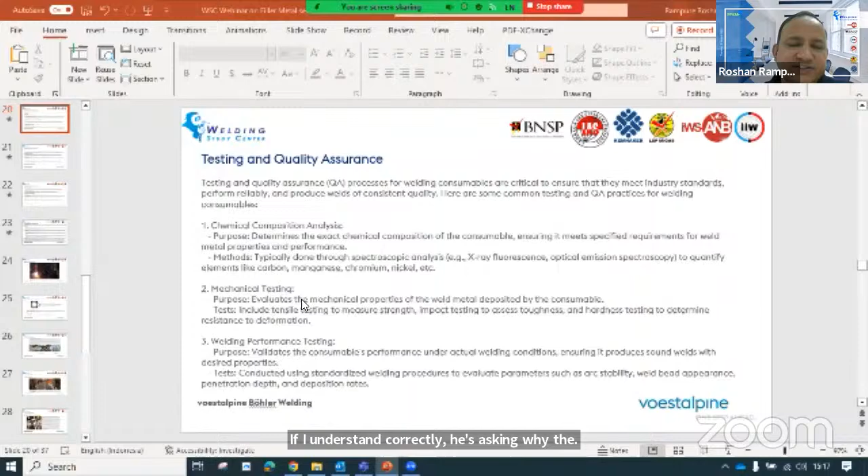If I understand this question correctly, let me answer. He's asking why the welding consumable selection is not done based on the strength criteria of the weld joint.

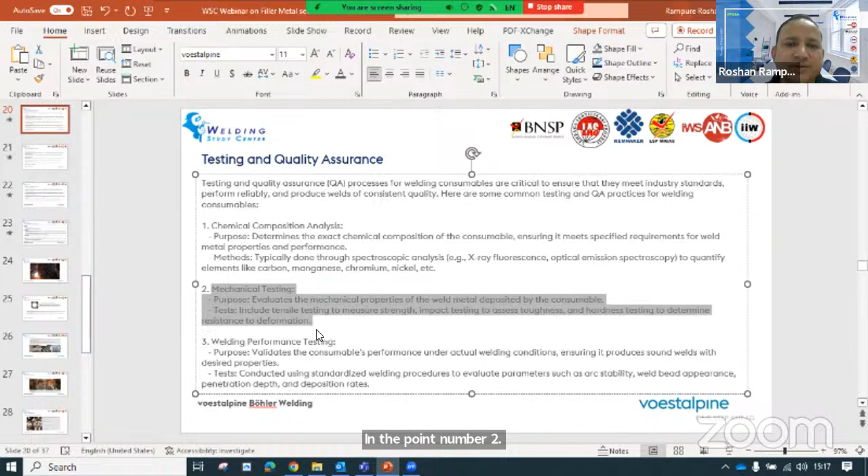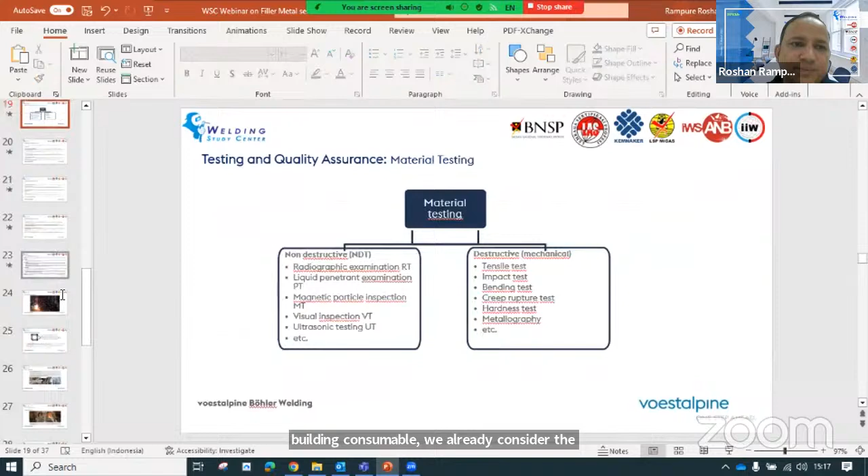Okay, it is already considered. The weld joint strength is already considered when we select the base material and the welding consumable. Like you see here in point number 2, mechanical testing means when we select the welding consumable, we already consider the mechanical properties of the base material.

So when we say mechanical properties, the mechanical properties of the base material are already fixed when you have decided the base material. So when we select a welding consumable, we select based on matching or slightly over-matching mechanical properties of the welding consumable as that of the base material.

So when we say mechanical properties, we already mean tensile strength, yield strength, ductility, and toughness. So these are already covered and already considered.

That is the answer to your question, Mr. Chandra. And then the next question is from...

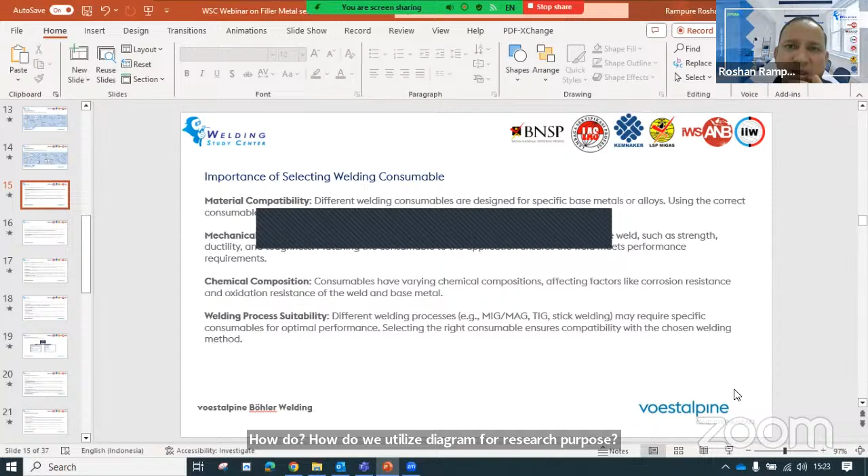In regards to dissimilar metal weld, how do we utilize the Schaeffler diagram for research purposes? Do engineers in the status quo still use this diagram to determine the chemical composition of the electrode, or is there any other alternative option for the electrode?

Sorry, can you specify which diagram? The Schaeffler diagram. Oh, Schaeffler diagram, okay. The Schaeffler diagram is for stainless steel material. It gives you an idea about what type of microstructure you will get based on the chemical composition.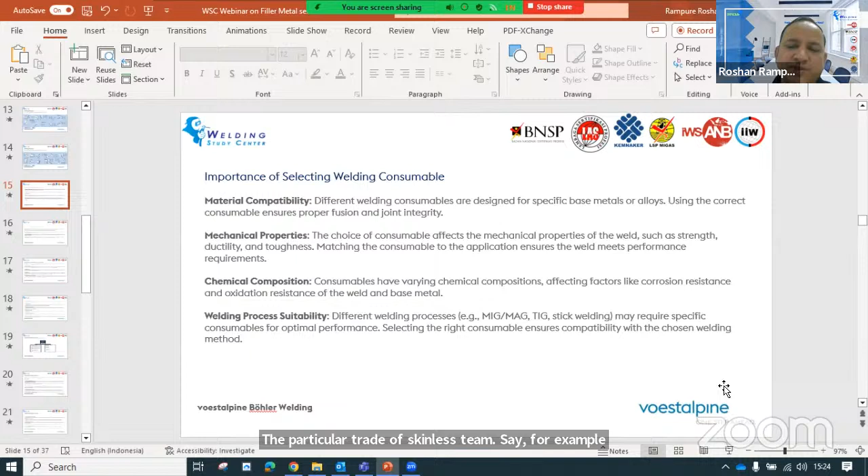If you ask for the practical application, I don't think it is of that much use, because in commercial application, when we specify a particular grade of stainless steel, say for example 316L or 304L material, it already has a certain range of chemical composition based on which the microstructure is already decided for the base material.

316L or 304L are austenitic materials having a majority of austenitic phase with some percent of ferritic or delta ferrite present in it. So this is already decided. For research purposes or development of new material, it can be used on a regular basis, but as a welding engineer, it is of limited use to us in terms of determining the welding consumable.

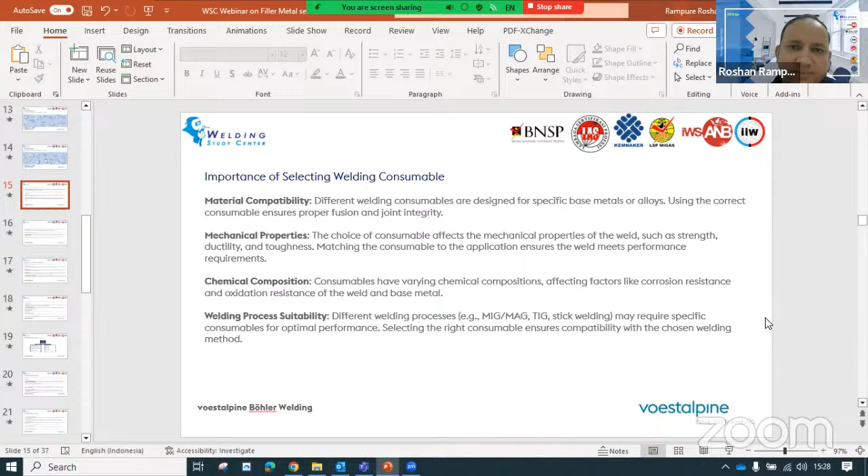How to adjust the current and voltage in the butt weld process of flat objects with different thickness, from a 12 mm thick plate to a 6 mm thick plate? How to adjust the current and voltage in the butt weld process, maybe the best voltage and current with different thickness, sir.

See, there are general recommendations from the welding consumable for different thickness and different material grades as well as the different diameters of electrode. With the use of those recommended parameters, you will get the optimum weld penetration as well as the width of the deposited weld metal in butt weld.

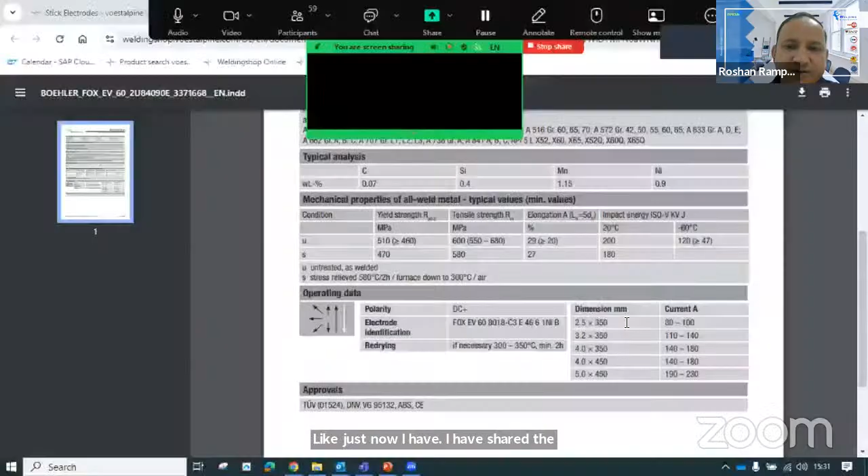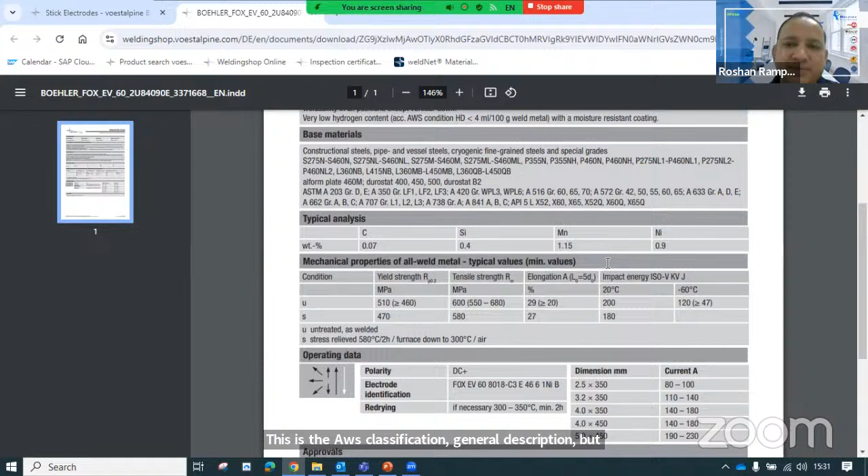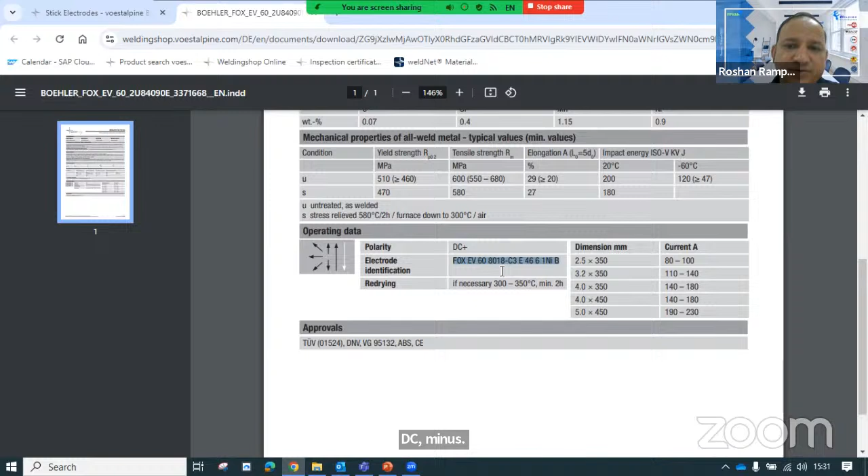When we supply the Böhler product, we also mention the recommended range of welding parameters on the label itself, and if you see the product data sheet, like I have shared just now, you can see for this product the AWS classification, general description, base material mentioned, typical chemical analysis and mechanical properties, operating data including what positions it can be used in, like vertical up, not suitable for vertical down, polarity, DC plus, the designations mentioned on the electrode, redrying conditions, and approvals.

It also mentions the recommended amperes for this product for different diameters and lengths. For 2.5 millimeter dia, 80 to 100 amps is recommended, this is the optimum range. 3.2 millimeter dia, 110 to 140. 4 millimeter dia, 140 to 180. 5 millimeter, 190 to 230. So these are the amperes recommended for different diameters.

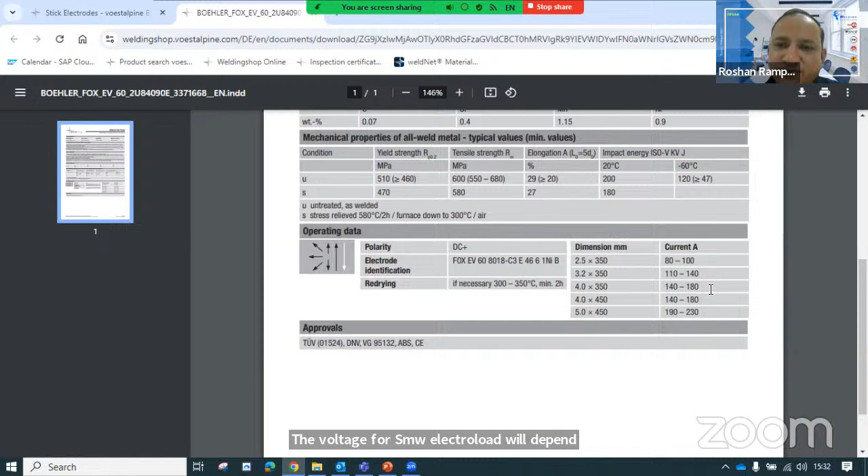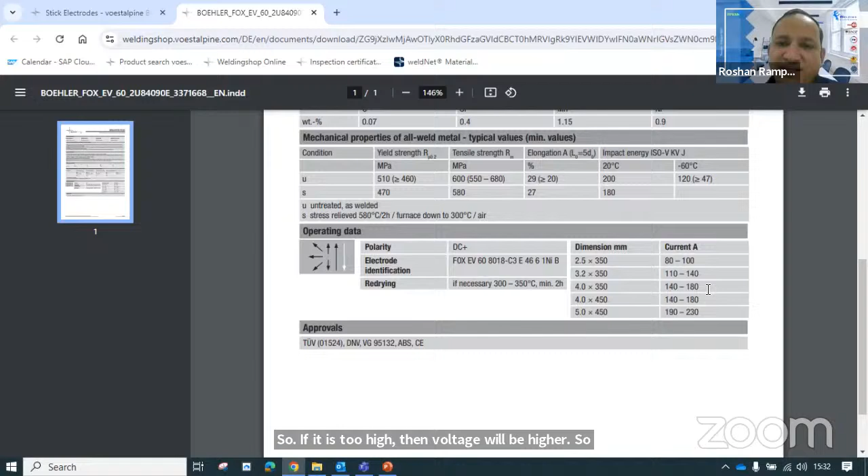Voltage is not mentioned here because the voltage for SMAW electrode depends upon the arc length, or we can say the stick-out, the distance from the base material to the end of the electrode. If it is too high, then voltage will be higher. It is a constant current type of process, so voltage is always fluctuating. Voltage has to be determined to keep the electrode tip as close as possible to the base material. This is how it is to be done, and you qualify the procedure by testing.

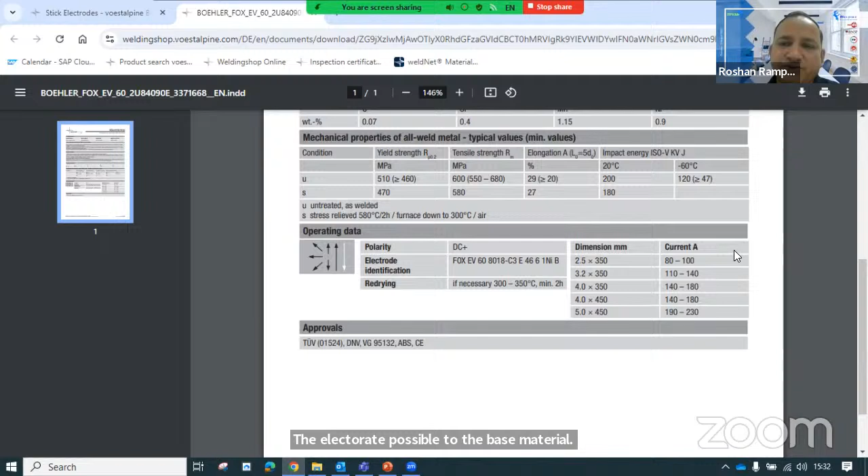If it is meeting the requirement, then prepare a WPS within those qualified parameters so that it will give you the similar results in the actual fabrication also.

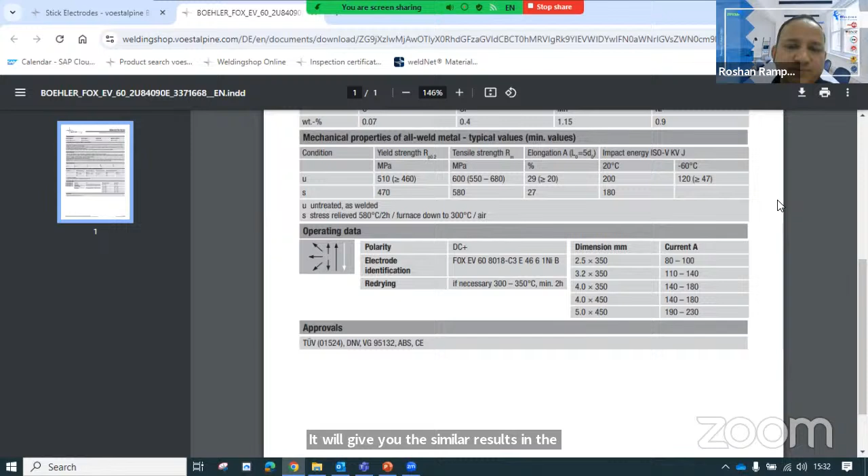Hope this clarifies. Okay sir, thank you for the answer. That is the answer for Pak Husni's question. And next, this is the last question.

Can stainless steel such as 253MA be welded using filler metal AWS A5.34 for flux core arc welding process? Because I see in ASME IX for stainless steel with FCAW welding process, it can only be joined by AWS A5.22.

253MA is a trade name of the base material, which is a type of stainless steel material. It is not, I mean, a standard grade listed in ASME or ASTM material. The typical composition for this material is around 20 to 22% chromium and 10% nickel with some percentage of nitrogen in it. When we say this is a stainless steel material, there is no exact matching classification as per 5.22. 5.22 is the filler metal classification for stainless steel FCAW.